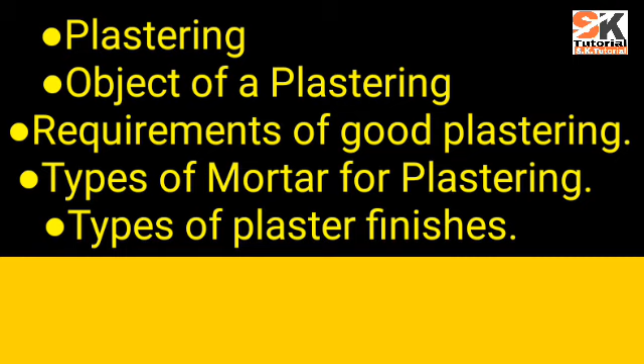In this chapter, the first topic is plastering. In this video we will also read objects of plastering, requirements of a good plaster, types of mortar for plastering, and types of plaster finishes.

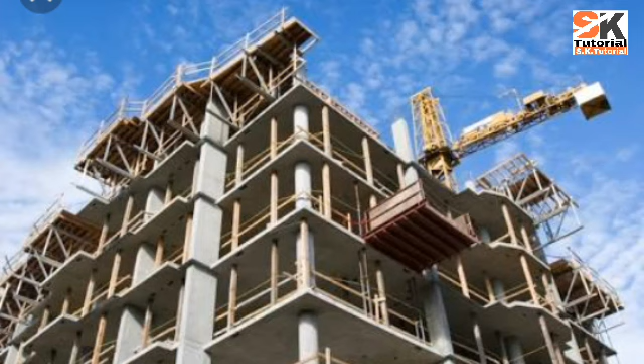Building construction is a traditional science which deals with the modern method of sound construction, incorporating appropriate use of materials, sufficient strength and permanence, maximum utility, and good proportions and grace.

The building design has traditionally been the responsibility of the architect, though the building construction has the responsibility of the civil engineer. However, the structural design of a building is the responsibility of the civil engineer.

Man requires different types of buildings for his activities: houses, bungalows and flats for living, hospitals and health centers for health, schools, colleges and universities for education, banks, shops, offices and factories for work, railway buildings, bus stations and air terminals for transportation, clubs, theaters and cinema houses for recreation, and temples, mosques, churches and dharmsala etc. for worship. Each type of the above buildings has its own requirements.

The above building activities are an important indicator of the country's social progress. This was the introduction of building materials, and now we will study plastering.

First of all, we want to know what plastering is and what the process of plastering is. So here is a simple definition.

Plastering is the process of covering rough surfaces of walls, columns, ceilings and other building components with a thin coat of plastic mortar to form a smooth durable surface. The coating of plastic material, that is mortar, is termed as plaster. Plastering on an external exposed surface is known as rendering. This is a very easy and simple definition of plastering.

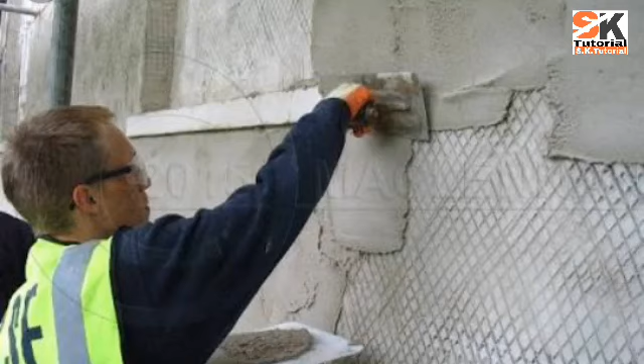First, to protect the external surfaces against penetration of rainwater and other atmospheric agencies. Second, to give a smooth surface in which dust and dirt cannot lodge. Third, to give a decorative effect. Fourth, to protect surfaces against vermin. And also, to conceal inferior materials or defective workmanship.

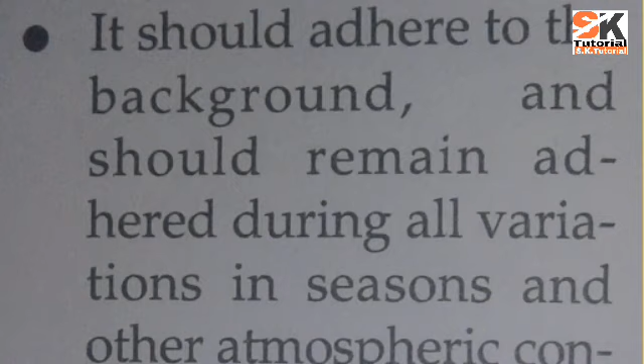Now we will study requirements of a good plaster. First, it should adhere to the background and should remain adhered during all variations in seasons and other atmospheric conditions. Second, it should be hard and durable. Third, it should possess good workability. Fourth, it should be possible to apply during all weather conditions.

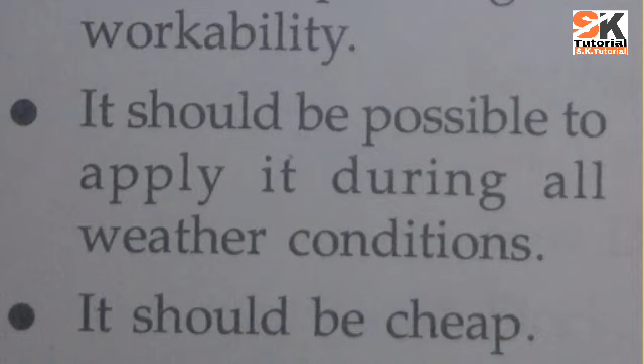It should also be cheap, and it should effectively check penetration of moisture. Hence, these are the requirements of a good plaster.

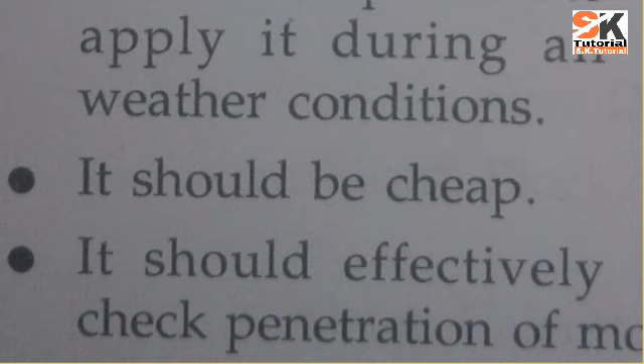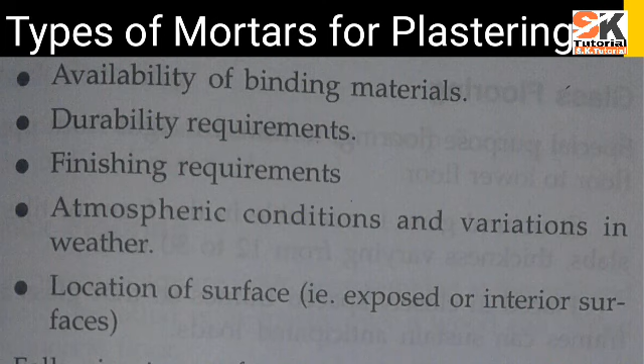Now we will study types of mortar for plastering. The selection of the type of plaster depends upon the following factors: availability of binding materials, durability requirements, finishing requirements, atmospheric conditions and variations in weather, and the location of the surface, whether exposed or interior.

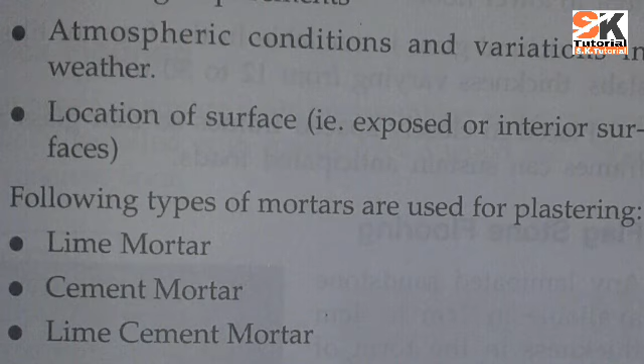Following types of mortars are used for plastering: first, lime mortar; second, cement mortar; and third, lime cement mortar.

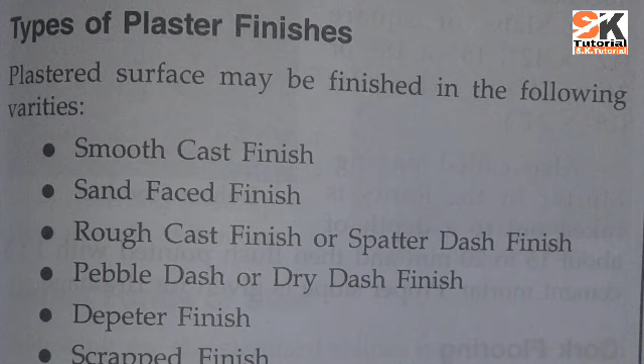Now we will try to know about types of plaster finishes. A plastered surface may be finished in the following varieties: first, smooth cast finish; second, sand faced finish; third, rough cast finish or spatter dash finish; fourth, pebble dash or dry dash finish; fifth, depeter finish; sixth, scrapped finish; and seventh, textured finish.

Today's video has covered these topics. The next topic will be finished flooring, and the next videos will discuss finished flooring classification according to materials, cement concrete flooring advantages, disadvantages, and defects in cement concrete.